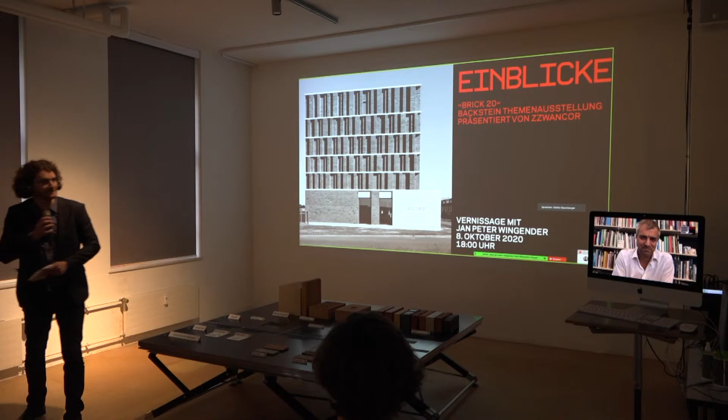Er wird uns anhand des Stadtarchivs Delft, aber auch an anderen Projekten seine Passion für Backstein oder seinen Umgang mit Backstein erklären. Jan-Peter? Yes, the stage is yours. You can hear me? He will speak in English I think, I'm on now.

You can hear me, I hope. Yes, okay, thank you very much. Thank you so much for the invitation, and apologies for not being able to join you for the opening of the exhibition and being in the room with you. It's a true pity, but these are the realities of these times. So I think it's the first time in my life I make a lecture from my desk in the office, which is a new experience to me.

But anyway, it's really joyful, and I'll try to take you along for half an hour on our fascination and joy for working with brick. We have a quite long-standing tradition in the office of working with this material, and it's something we very much enjoy. I should see, Stefan, if I can... Yes, very good, I think I control the screen now, so that's all very good.

So what I will show you today is a series of projects. I will go rather quickly through them, but what I'd like to share with you is a kind of underlying debate, lines of thought, concerns we have with the application of brick as a building material. I will discuss them as brick dresses, claddings, Backsteinkleid if you like, and also the fact that a lot of things are happening in brick development. One thing that bothers me personally is that many of these developments go unspoken, whereas I consider them to be very big steps in architectural thinking. I'll get back to that later.

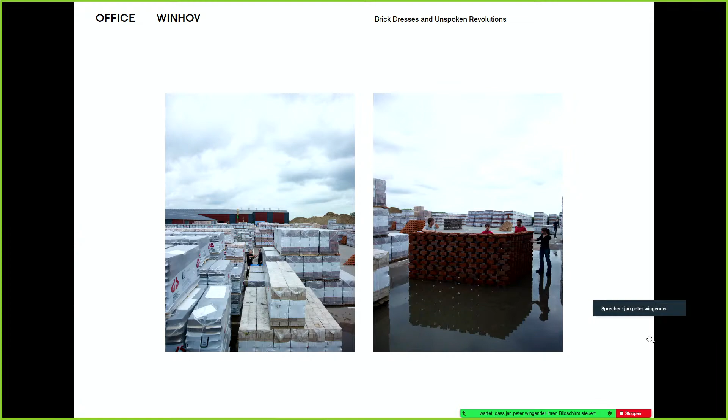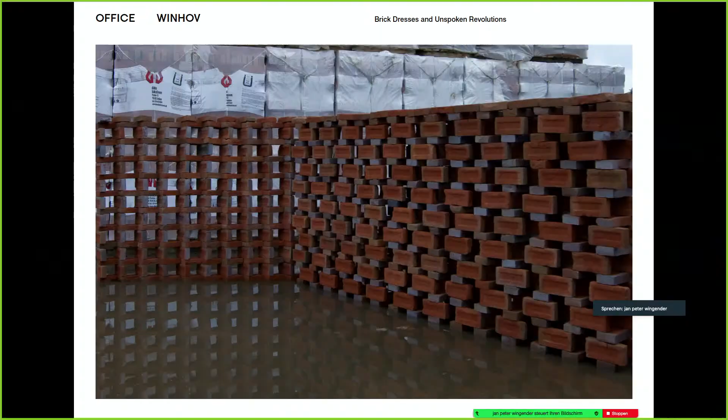For example, the four students you see now on the right-hand picture, they never worked with bricks. It was their first day playing around with bricks, but they were actually capable in a very short exercise to build this beautiful wall, just by stacking, just by playing. Try again, have a coffee, let's do it again, and then we create something that we never designed. It's designed by the thinking of the making almost, or making as a source of design.

And it's still something very, let's say, near and dear to my thinking. For example, the direction that you see changing in the wall, it wasn't designed, it was just the pattern that we were stacking. We were taking that literally around the corner, and then all of a sudden the whole appearance of the wall changed. These are things you can try on a computer, but they are so much more fun when you work with them, when you have a certain intimate relation with the material. And that we carry very much in our DNA, in what we are doing as an architecture office.

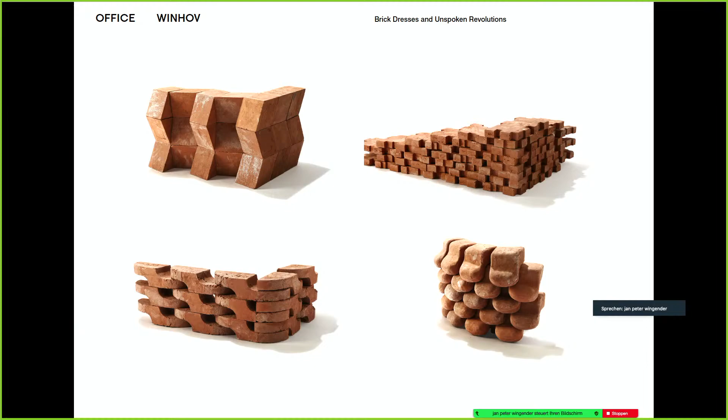And of course, there's a next step to it. At a certain point, I ask my students to start to design bricks. So let's not design a building, but let's design a brick. And if you then make them, and the factory was kind enough to produce small productions of it, you can actually create a completely different kind of architectural expression through thinking through the smallest item that you're actually constructing with. And I find that fascinating. It's something that I enjoy very much, and we also apply that in our own practice.

So I would like to take you along a few buildings that we have been cladding with bricks. I'll get to this notion of cladding later on, but the application of brick in the Netherlands is basically the cladding of construction. That's why I speak of it as a brick dress. It's my shirt, but then out of bricks. It's not the building, it's not the main construction, it's not the foundations, it's a dress. It's the way the building communicates between the interior and the city, and this skin as a protection, but also as an expression of the building.

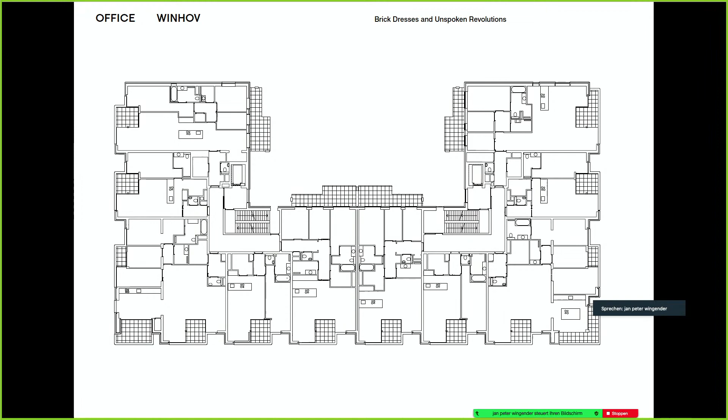So practical, unspectacular, I would say. But something that we very much enjoyed in this project was our collaboration with the manufacturer of the bricks. Because when you work with a material, I love to go to the place where they produce materials. So we went to the north of Germany, to a very small family business who produced fantastic bricks.

But through the firing process you get a color richness and a color tone sensation in these bricks which you cannot mimic anymore. This is an almost natural process. And the other thing that this factory was willing to do with us was to actually play around, as I played around with the students.

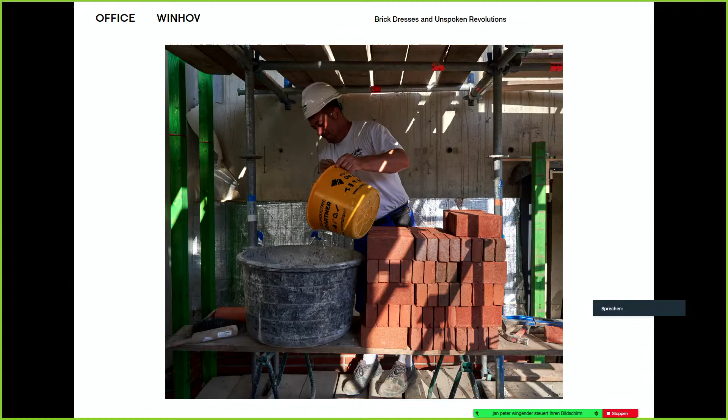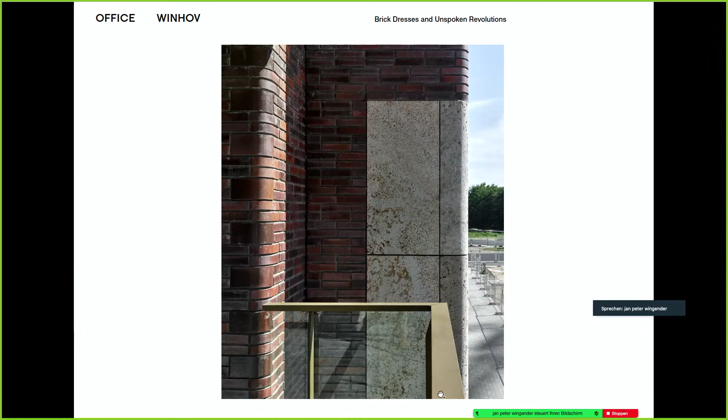They really own the tradition of brick buildings, and with them together, the richness of the brick, the richness of the production of the brick, and the craftsmanship of the mason, we cladded this building. We cladded it in natural stone and bricks. So this is an entrance situation. And as you can see, all these rounded details and small changes in patterns you can resolve just with the game with the shape of the bricks. So by thinking through the smallest module, you actually can create a building.

Here's this tradition of bay windows that we were very fascinated with. And it is a modest natural stone plinth that carries these bays. And as you can see on the top, there's refinement in the brick patterns as they stand. And it's all these elements that lend such a building its expression. It's through the craftsmanship of the brick factory, craftsmanship of the mason, and to be honest, we play around. We design by playing, and I love to do this. And I think we are very happy with this project because this tradition of brick making and brick application is of such value to architecture.

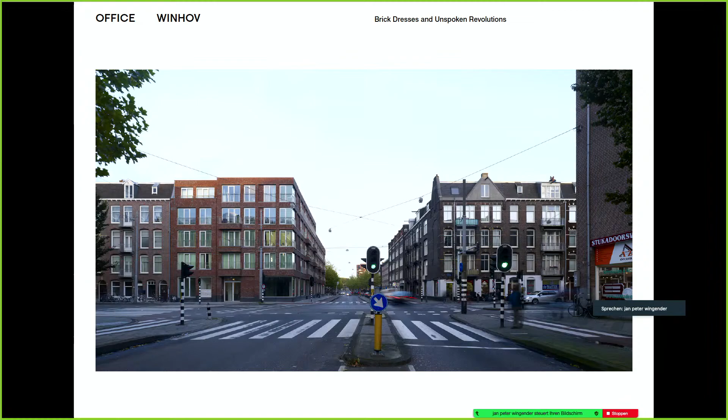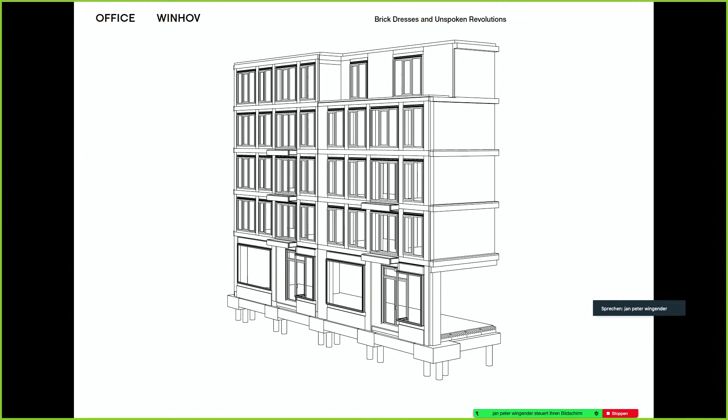And what I would like to point out in this project is actually this problem of the construction of the skin. Because this is the main construction of the building. It's very pragmatic. It's partly concrete, partly kalksandstein. Nothing very special, I would say, about the construction of this building. And of course, like in all countries, it's getting insulated. We put the window frames in it.

And then something interesting happens. We get to a secondary construction in the building practice in the Netherlands. And these are all these kind of secondary steel elements we start to put between this kind of insulated facade and the brick outside. And that is all because we need to keep up the dress over the floor. So we have all these kind of secondary constructions holding up actually the brick dress itself.

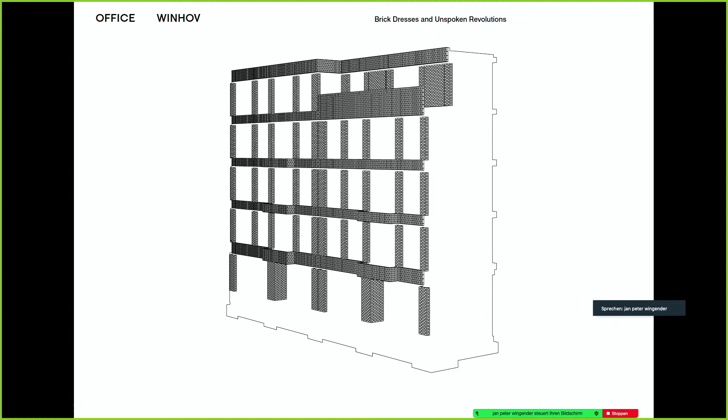And we were getting somewhat a little bit concerned with the amount of secondary construction we had to put into this building. We were also designing in such a way that we would hide, for example, all the expansion joints, the Dehnungsfuge between the brickwork that we had to do. So the whole project was about designing actually around this secondary construction, in order to avoid their presence

or to avoid the experience. So what you see, for example, is that many of the bricks stand in a soldier course so that an expansion joint is not going through the bricks, but is actually within the joint of the brick itself. And it creates this very strong homogeneous expression of the building. But it's also a little bit of a concern, because where is this going? In a world where we talk about sustainability, longevity, all these kind of things, it gets a little bit tricky slowly, we have the feeling.

So it was a reason for this research project that ended up in the book Brick, an Exacting Material. It's exacting in a sense that it's very demanding. You can work in a very exact way with bricks, like I showed in the first project. Something I enjoyed, but it's also demanding. It really requires, we found out, a lot of experience in order to work with brick in the appropriate way. The book explores a period of time in which we also developed ourselves as architects.

I mean, the last decent publication on brick was around the beginning of the war. It was a publication, Nederland bouwt in baksteen, Holland builds in brick, and it was meant as a celebration. Everything went wrong probably around that exhibition. And brick also was a very controversial material in post-war Holland, where the moderns were saying, oh, it's such an old-fashioned material, it's so traditional, we don't want to work with it. But in reality, they built a lot with bricks because that's the common building material in the Netherlands.

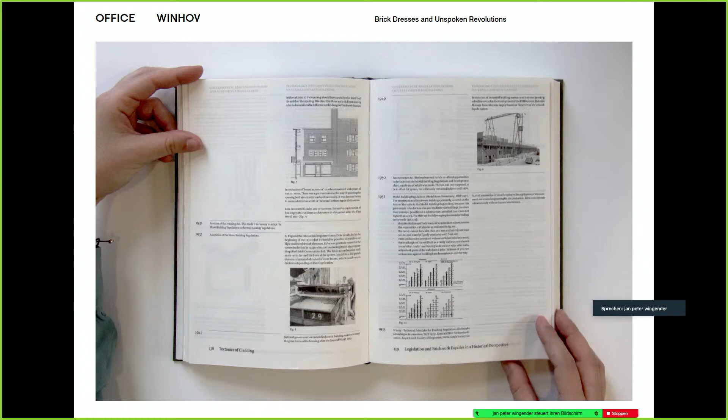Whereas at the end of the 1990s, when we started our practice, brick wasn't a building material anymore. Brick was a cladding material. And the book explores that transition. The book also explores what kind of new possibilities this leads to. So I'm not negative about these things, but they bring us to new realities as architects that we need to respond to. So the book is about technique. The book is about the joy, the incredible joy and colors and very fascinating qualities you get in this product.

The book is about exploring, but really showing this tradition of cladding. I mean, even in a project like this one, which is the famous small atelier building that Bearth and Deplazes built, in which they claim it's a full brick building, that all the bricks are load bearing. If you really look at it, and if you draw it up, and that's the right-hand side, everything on the right-hand side is cladding, is not load bearing. That's just to make you think that it is load bearing, but it is not load bearing.

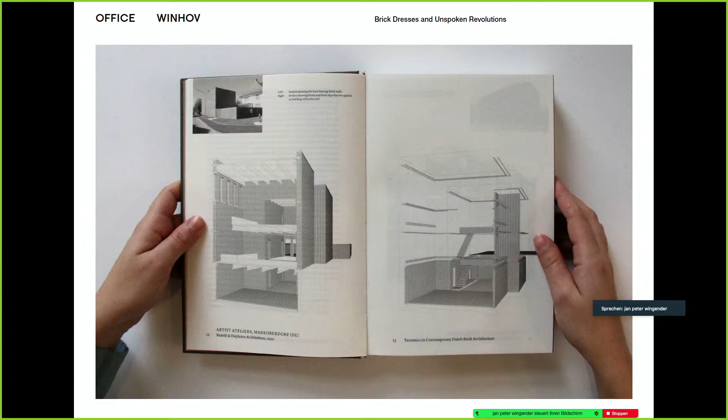It's the expression of load bearing, which is fine with me. That's a full standing architectural tradition. But we need to discuss it, you know, and we need to get away from the association with it. So

this notion with bricks of a kind of sturdy material, load bearing construction, all these kind of things, to be honest, in most of our brick buildings, nonsense. There are brick dresses, which is okay, but let's discuss them as brick dresses. And I think in this whole development of brick, we are slowly at a very difficult point.

100 years ago, which is the most left section, in the Netherlands, we would construct pretty simple. It's a full brick wall of 21 centimeters thick, no insulation, no cavity, and a single plain window frame in it. By the 1910s, 1920s, we started to divide between an inside and an outside with a cavity wall. And then in the 1970s, we started to put insulation in the cavity wall.

And by the time I was starting to study as an architect, they taught me this. This was how you would construct a building. So you had like this inside, then you would have a cavity with insulation in it. You would have a brick outside, and you would have a window frame with 2 sheets of glass in it.

And during my development as an architect, I end up now with a right-hand image where I still have this inside. I have a window frame that in the meantime has 3 panes of glass in it. So the glass industry is really like the winner of the sustainability race. They're the true winners because they tripled their production.

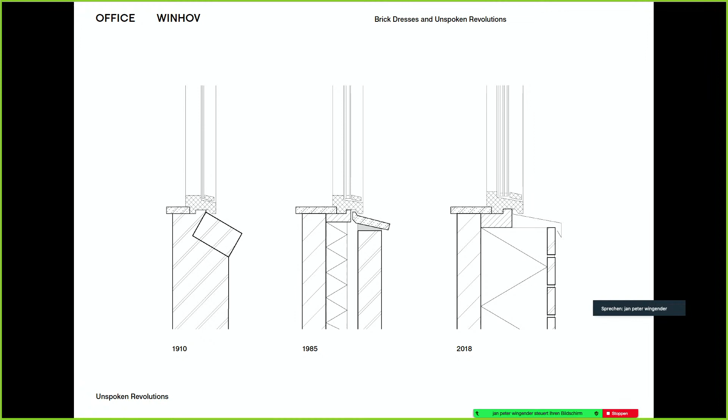But my concern is what is happening to the brick, because the insulation is getting thicker and thicker and thicker. And due to that, the brick is getting thinner and thinner and thinner, and we now glue it to the insulation. That's what you get on the right-hand image. You know? Flatly, they're tiles by now. And of course, they have nothing to do anymore with the kind of constructive material stacking. It's not even stacked anymore. It's literally glue. We presume it's being stacked, but it is not anymore.

And to find expressions of that, and also to discuss the transformation of the material, I find something which we need to do as architects among each other. It became to us somehow prominent when we were working in Zurich on the Freilager project with our, I would say, sister office of Office Haratori that we have been working with in the past 15 years now on a whole range of projects.

And in Switzerland, with the Minergie eco standards, you're way ahead. You're really also way ahead of the Netherlands. And when we started to construct the Freilager project, I was somehow frightened when I came to the building site. It's just this kind of 30 centimeters of Dämmung, of insulation, that you get on a building. I mean, it's impossible to do bricks.

That's what I saw. But what I also saw is, if I would like to characterize Swiss housing, and especially the outside space to apartment buildings, you get two types. Mostly you get a loggia, because then you can put the concrete element on very small elements within the insulated facade. Or I see housing with a kind of secondary construction around it that holds up all these balconies, and both lend very much the expression to Swiss housing.

At the Freilager project, when we started it, we were very fascinated with two brick buildings that were adjacent to the competition site, beautiful full red bricks with a concrete construction on the inside. And we had a feeling that the project that we would propose needed to respond to that. So we developed, in terms of materials and in terms of layout, a certain familiarity.

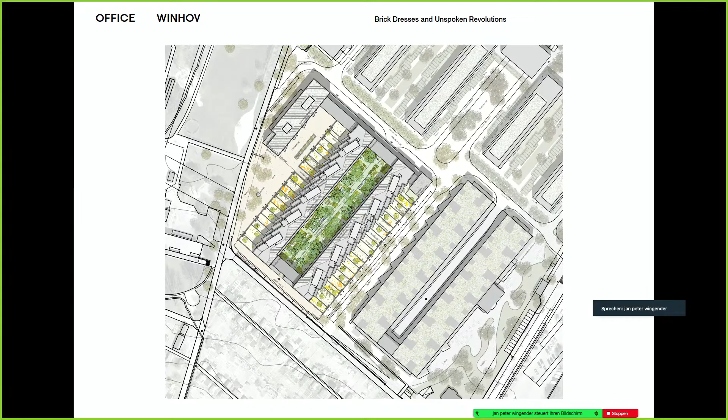For that, we kind of inverted the proposed structure, which was actually very conventional streets with an inner court. We transformed that. We said you enter through the inner court, and we put garden and garden walls to the outside in order to extend the street profiles and to open up the urban setting towards Uetliberg.

And of course, we were very interested in these bricks. So on the left-hand side, our small cutting out of the bricks. We went on the building and we cut out bricks in order to have them as samples.

And then we took them to a German brick factory and we asked them, can you give us the same color, the same texturing, and can you give it this in a red color, and can you give it to us in a kind of almost silver white color for the inner court, because we wanted to play with them.

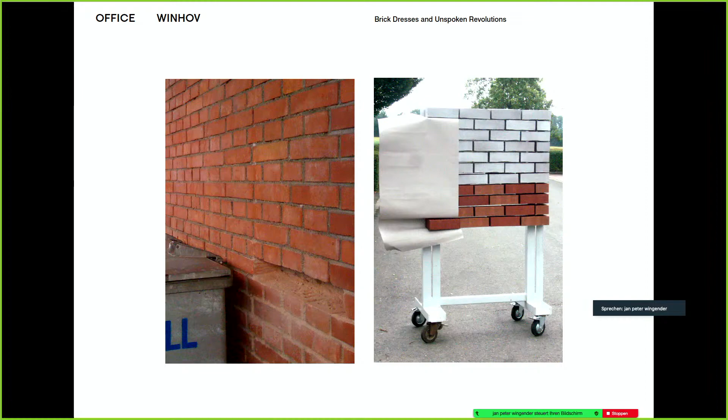And again, here comes the brick factory, the people that control the kilns that can say, yes, I can make you a red one, I can make you a white one, and it's a full game you can play then with the expression of material, and through that, of course, the expression of the architecture.

The client demanded outside spaces, and he demanded outside spaces on both sides of the apartment, which was just a kind of incredible generosity. A big balcony, almost as part of a room, and a kind of almost veranda-like typology on the inner court, which you see on the front is to the outside, and what you also see is the apartment plan slightly twisted to give you the view to the south to Uetliberg.

And then, of course, we came to this discussion on how you construct outside spaces in Switzerland. And we thought, okay, if we have to make these kind of secondary constructions for the balconies to keep them up on this kind of highly insulated facade, then why not apply bricks again as they were originally used as a constructive material? So can we make this kind of secondary construction in front of the building completely out of load-bearing bricks and just have all the balconies on it?

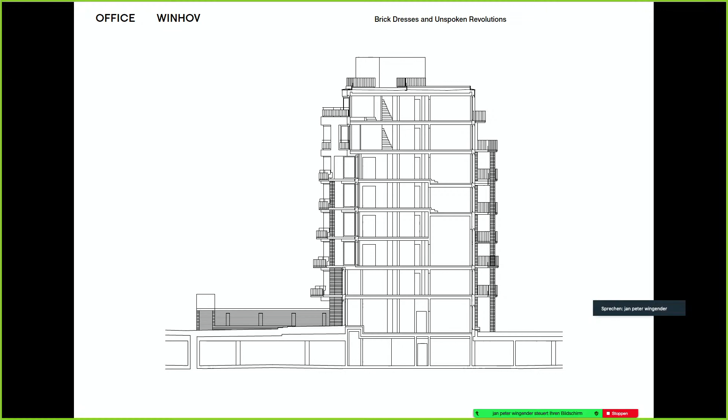Which was a very simple question, which we put in the competition, and that cost us a good 2 years of very, very hard work to actually get it done. And then, of course, the garden walls on the left-hand side could be done in bricks. So there was this presence of material in the project. It's a big project. This goes up 7 floors with brick pillars, and then all the balconies on it.

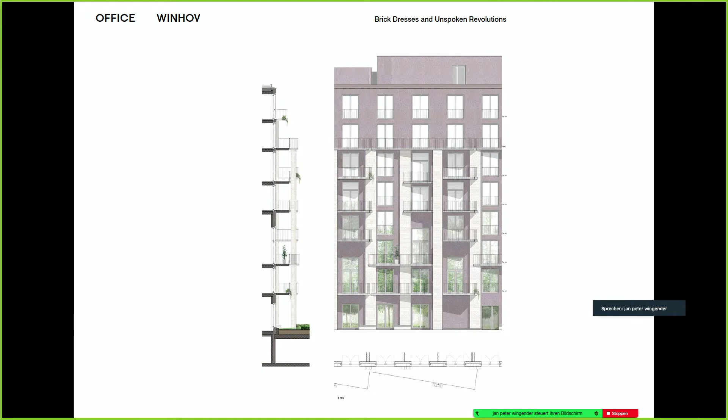The funny thing is the load-bearing capacity of the bricks made it very easy on the lower side of these pillars to handle all the weight. I mean, there's enough weight there to keep the whole thing stable. And the problem being that as we moved up, and if you get to the top of the building, the pillar gets so high that it almost becomes unstable.

So the funny thing was, everybody thought like, oh, can the brick handle this? The brick handles it easy. I mean, the height, that was like the true problem in this project. But we got to do it. We got to construct it. And the balconies that we put in it are big. They are really big outside spaces.

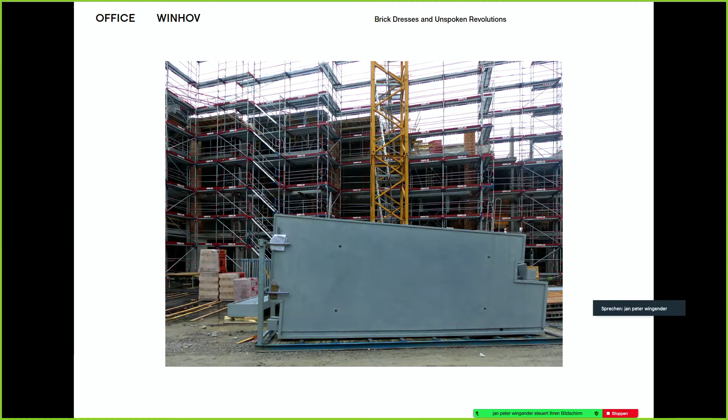Here you see a balcony plate. And you see also immediately the trick. That's like the two knocken or the kind of small elements that you find on the right-hand side and on the left-hand side of it that we used. So we stacked up our concrete plates in front of the building with tree trunks to hold them up and get them at a precise distance.

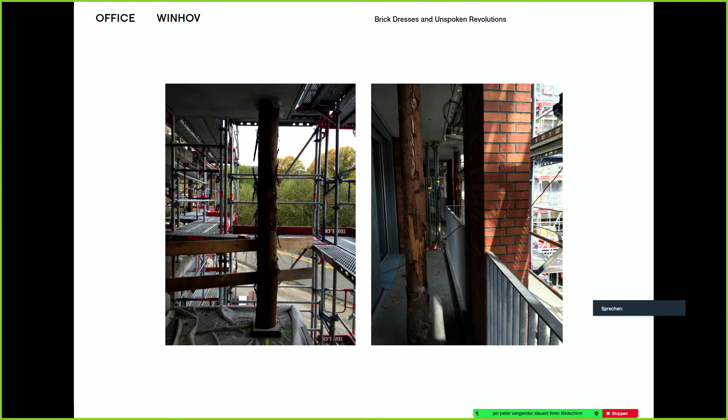And then we masoned these brick columns to keep them up. So all these big plates are not attached to the building, but are basically freestanding in front of the building. So you look along the insulated facade with traditional plaster, Zurich style. You see the balcony plate and you see this concrete element, this knocker.

And then you see the brick pillar coming up here. And there's a little piece of ironing in order to distribute the forces equally into the column. And with that, we could construct the secondary construction, again, in full masonry brickwork.

And works. So we were able to make a brick project next to a brick building to build this kind of urbanistic and familiar relation, and again applying brick as a constructive material. And we thought that was a very, very interesting, let's say, alternative to brick as a cladding material, or even as a Plättli, as a kind of glued bricks on the insulation. Because here brick is employed again as a material that has a constructive capacity in it.

So we proposed that to clients in the Netherlands, and we tried to convince them slowly that we should get to self-supporting brick facades in front of buildings. For two reasons. The detailing gets incredibly easy if you do a self-supporting brick facade. And you can put all the outside spaces, like in the Freilager project, on the facade and on brick columns, if you like. So this was simultaneously to Freilager.

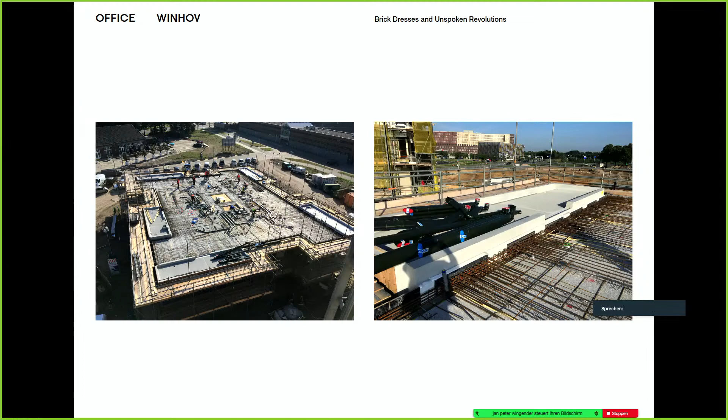hanging like that in front of the building. And we were discussing with the client, should we do a self-supporting facade, and should we not just put these balcony plates on the self-supporting facade with a column in front, and then we're done? They said, no, we don't want to do. We do it the traditional way. This is the way we have always done.

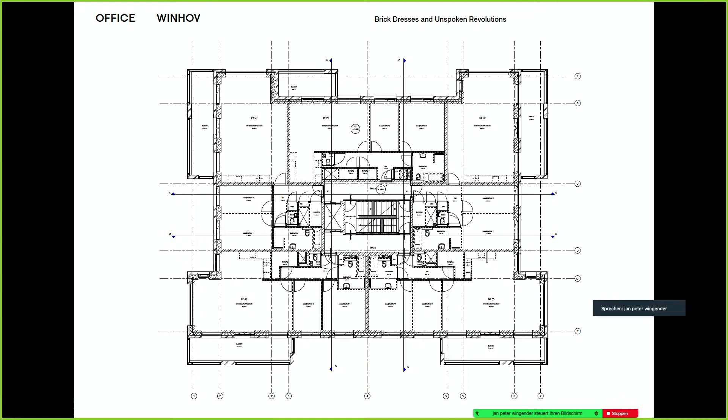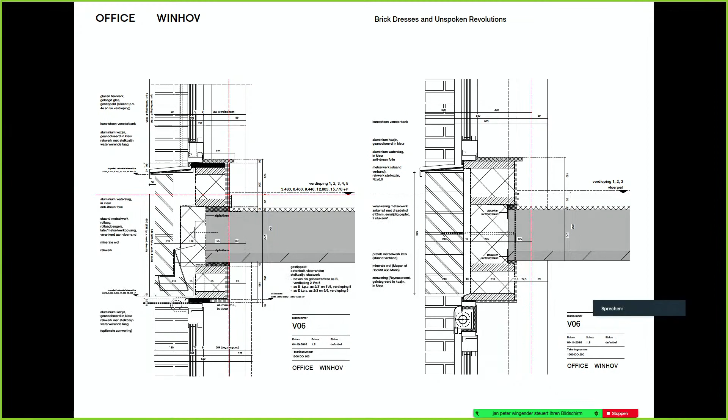And if you do it with a self-supporting facade, you would get the right-hand detail where life just gets very, very much easier. You have no cold bridging anymore. You have way less problems with waterproofing and water tightening of the facade. So yes, your facade gets thicker, but life gets much easier if you do that. So actually, the project was an attempt to show them that the increase of the proportion of facade also brings benefits. And we calculated that through with them, front to back, because they were very interested.

And on these small apartment buildings, price would go up 5%. So that's a lot. That's true. And of course, the bruto-netto balance in the facade changes, and for that, you get 2.2% less netto square meters compared to the brutto ones. And the contractor, of course, said, yeah, but I have more masonry work to do. So when it rains and I cannot do it, my risk gets bigger. So these were the three disadvantages.

And they deal with the money of construction itself. And the problem in the Netherlands very much is that we look at the cost of construction and not so much at the cost of the life cycle of a building. And that is a general problem.

I think in Switzerland it's also very much a problem, because if you start to consider these type of constructions with self-supporting facades in terms of life cycle costs, they get very, very interesting. Because the facade itself, being freed from all these kind of steel secondary constructions, detailing, and all these kind of things, the facade gets way more sustainable, really much more sustainable.

The wind loads are taken by the outer facade. There's an enormous reduction on life cycle costs. The maintenance of the facade goes down and the longevity of the facade goes up. So if we're looking for sustainability in terms of longevity or durability, then these facades are actually very interesting. You need to invest more in the beginning, but you get a facade that lasts longer.

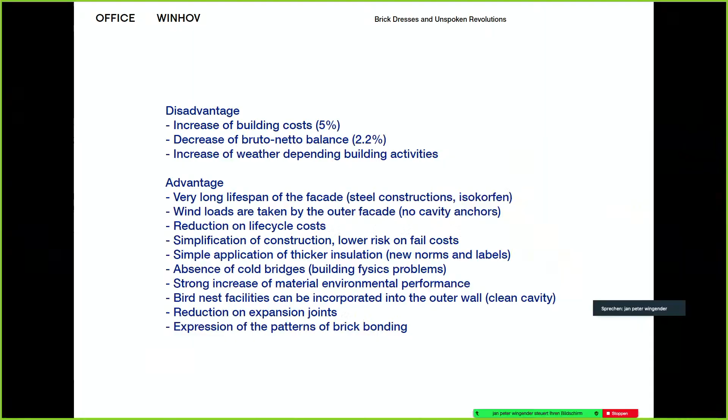Of course, there's a simplification of construction. You can apply easy, thicker insulation. All these kind of things come. The basic balance at the moment, and many of the debates in the Netherlands are about this, is if you want really to have a sustainable, durable building, you might start to consider a self-supporting facade around the building, which is a counteract to, let's say, the problem where we are with gluing bricks on insulation. I'm very interested to develop an alternative to that.

I go to the Delft project, which in the exhibition, we were granted the Brick Award for, which we are incredibly proud of. It's also really something we enjoy very much, because it's part of an ongoing love relation with this material. And of course it gets to the issue of tectonics. It is the cladding of construction, but it's also tectonics in a sense of the expression of material, the expression of the construction of the cladding itself.

Because that was something we were very interested in with this archive building. An archive is basically a very boring building, because it's a closed concrete box that is climatized, and on the inside you keep basically your history. You keep a treasure, if you like. And the Delft archive especially holds a fantastic collection of historic material. And they were building it new on the outskirts of the city.

Actually in a landscape of infrastructure, big boxes, like expedition centers and all these kind of things. And they said, yeah, it's just basically a warehouse. We said, no, it's not a warehouse. It's a jewel box. Basically, you have to construct a jewel box because the inside of it contains culture, contains your own history, and you need to express that.

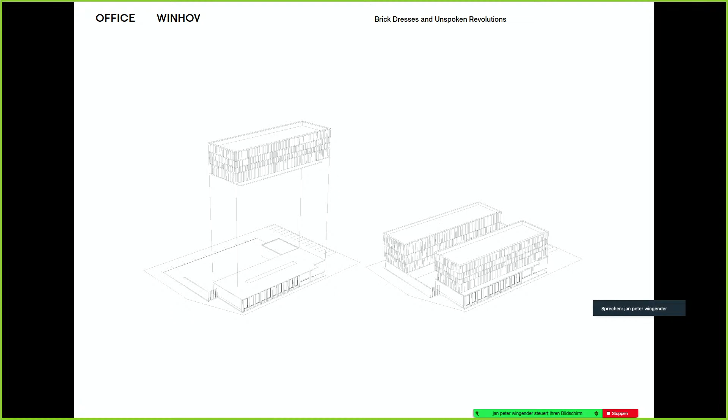So they asked us, can you immediately design the extension of it? Because archives have this tendency to grow. So we said, yeah, you can immediately build a second box behind it. So there was a kind of bigger master plan in which we made this first step.

Very simple section, a ground floor with all the offices and public reading room. And then above it, basically a climatized concrete box with archive in it, which is unspectacular, but demands an expression.

There's no window to it. It's not allowed to do a window. But this idea of what you see in the shelves, this stacking, was something that intrigued us. We thought that's like the expression we could look for, and then we started to play. We were influenced by one of our most favorite artists whose work we absolutely love, Jan Schoonhoven, who happened to be from Delft.

He always built these kind of fantastic reliefs in cardboard with paper on top of them. And we considered our facade a little bit almost as a similar canvas. So we played with patterns, we played with this idea of stacking, and the facade looks random as we built it, but actually it's not. We designed the patterns in such a way that they are repetitive, because otherwise they get very difficult to make for a mason. If you ask a mason to do something wild, he cannot do it. He can only work in patterns.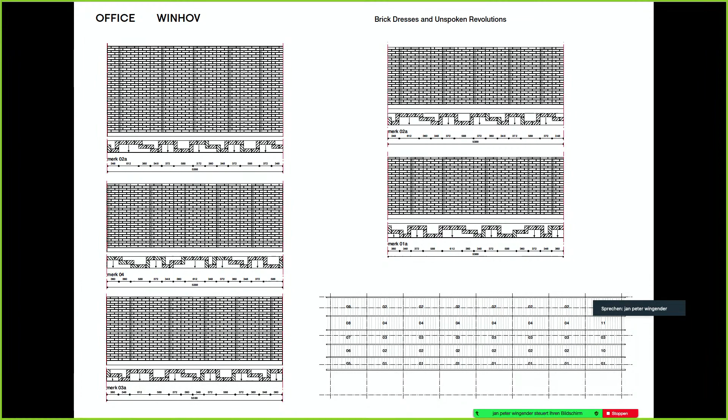So we had to give them a pattern that looks random, but it is actually kind of a very organized pattern. So on the right hand, the kind of facade module, and on the left and above it, the pattern elements, the repetitive elements on how we organize the structure.

It is basically the ground floor, and then there is a big concrete beam that holds up the entire facade above it, and the rest of the facade is this relief. And then there is this horizontal line that kind of helps us to make the jumps in the brickwork. That works as a connecting element, as a ring element around it.

It works on relief. It works on the play of light, the shine and the shadow, the rhythms, all these kind of things that make it a very rich building to look at. That kind of signify - there's no window in this, but there is something going on the inside of this building. That is, to find that expression and use this kind of very basic material.

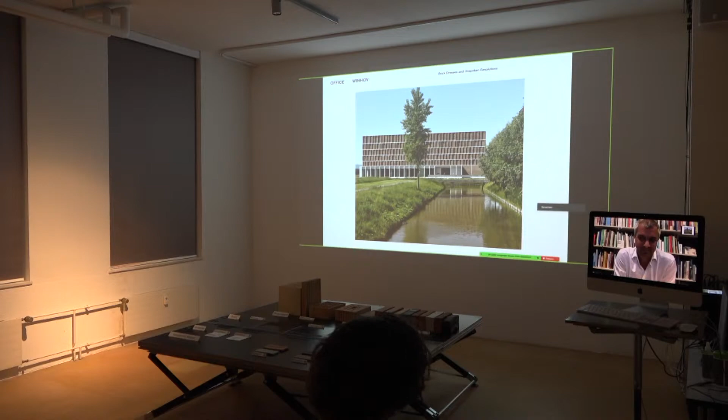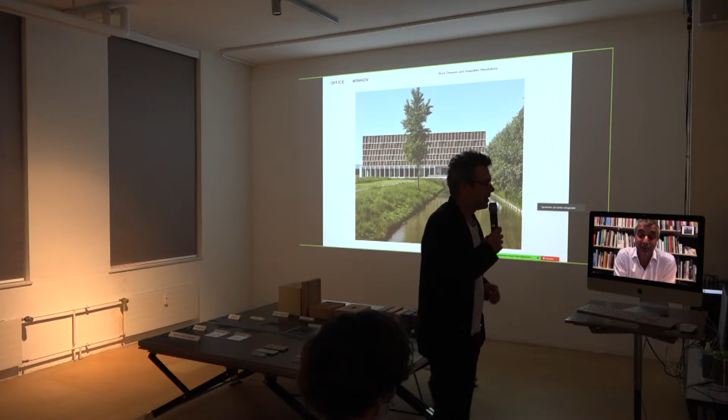Jan-Peter, can you hear me? Yes, I can still hear you. Did you hear the warm applause that you got from the audience? Thank you for being with us tonight, at least here via Zoom. And well, maybe I will give the public the possibility to ask you some questions. Maybe somebody has a question for you.

My question - well, you managed in your career to make brick buildings, to move away from the cladding to make a self-supporting wall, a brick wall. Do you think that you will manage to make a supporting brick construction in your career once? That the supporting construction will really be made out of brick?

As always with architecture, you need a client. You need somebody who has the guts to do it. And I must say, with the Freilager project, we got a client who was willing to take the risk and who was willing to explore this step into a world of load-bearing capacity of brick again. And slowly, we're moving within the Netherlands with some of our clients who keep their buildings for a very long time.

They slowly share with us a fascination to do this. I presume within 5 years we will have the first projects going on with this idea of a self-supporting facade, rather than a very thin facade, getting back to this tradition of a thick facade.